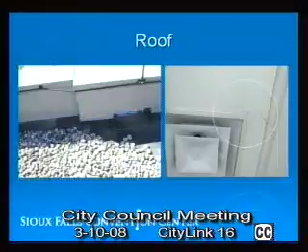Yes, we have two different budget items pertaining to the convention center. We have an OSEP budget. In the OSEP, which is $100,000, the convention center has identified two projects they would like to substitute for the two that were in there. In the original 2008 OSEP, there was an identification system for $75,000 and two portable dance floors at $25,000, totaling $100,000. The convention center has asked us to submit an amendment tonight that would substitute for those two projects a scrubber, a network upgrade, and one portable dance floor, which would equal the $100,000.

Okay, thank you Mike, so that's not any additional funding. The other 100 you're talking about would be what we call deferred maintenance, and that's a separate amendment we had talked about adding into the budget this year.

My only concern was, if we were to offer an additional $100,000 for deferred maintenance, what would they use it for? I think they've identified some priorities that need to be taken care of. The first priority was replacing the carpet, and then these other projects would equal just over another $100,000. So hopefully that clarifies it for you.

Further questions? Gene, it's my understanding that the improvements we're talking about this evening are also part of the agreement the city of Sioux Falls signed with the Summit League in their commitment to the community for a certain amount of time - that's the part on the arena, right?

Correct, the $411,000 - if you need part of that for the locker rooms and that kind of stuff. Yes, that's part of it. Okay, thank you - probably most of it.

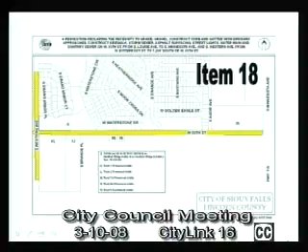Further questions, Chad, on item 18? Others that wish to address the council on item number 18? Not. Is there a motion?

Move to approve, Brown moves. Is there a second? Second, Litz seconded. Further comments on the motion to approve? Seeing none, all in favor of the motion to approve, vote yes. Those opposed, vote no.

Item 19 is a resolution declaring the necessity to grade, gravel, construct curb and gutter with driveway approaches, construct sidewalk, storm sewer, asphalt surfacing, and streetlights on South Bahnson Avenue from East 57th Street to East Mission Street, and assessing the cost to each lot or tract of land benefiting thereby.

This portion of Bahnson Avenue is a paved, half-urban, half-rural section. The east half will be constructed to an urban section, and sidewalk will be installed on the west side. There are 12 properties that will be assessed for these improvements. The cost estimate is $400,000, and the majority of these costs will be assessed. There was no opposition voiced at the public meeting.

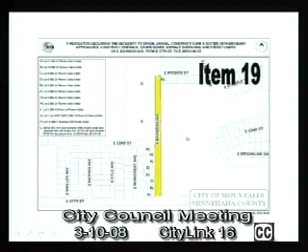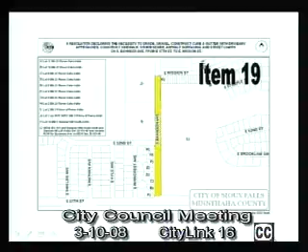Questions of Chad on item number 19? Others that wish to address the council on item 19? Is there a motion to approve? Move for approval, Jamison moved. Is there a second? Second, Benega seconded. Further comments on the motion to approve?

Seeing none, all in favor of that motion will vote yes. Those opposed, vote no. Councilmember Litz, yes. Staggers, no. Benega, yes. Brown, yes. Costello, yes. Jamison, yes. Kavanaugh, yes. All members present voted. 6 yes, 1 no, and 1 excused. Item 19 has been approved.

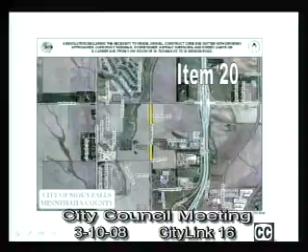Item 20 is a resolution declaring the necessity to grade, gravel, construct curb and gutter with driveway approaches, construct sidewalk, storm sewer, asphalt surfacing, and streetlights on North Career Avenue from 1,100 feet south of West Hickman Street to West Benson Road, and assessing the cost to each lot or tract of land benefiting thereby.

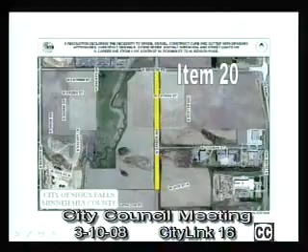This portion of Career Avenue is a two-lane paved rural section. It will be constructed to an urban section with sidewalks on both sides of the street. Career Avenue is an urban section from Maple Street to the construction limits of this project to the north. There are 12 affected properties that will be assessed for these improvements. The cost estimate is $850,000, and the majority of these costs will be assessed. The affected property owners support the project.

It's my understanding that you have received a letter from one of the property owners. That property owner and another property owner are working out a drainage issue that we hope to have resolved before construction begins. Questions, Chad, on item number 20?

Kermit asked: on the cost of the $850,000, in our notes it says all costs will be assessed. Here I said the majority of these costs. There is going to be some city costs on this. Do you know how much the city might be paying? It's probably under 10%. Okay, thank you.

Further questions, Chad, on item number 20? Others that wish to address the council? Your name and address, please. My name's Damian Grebel, Earhart Griffin and Associates, 300 North Dakota Avenue, Sioux Falls, South Dakota, 57104.

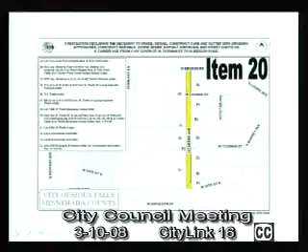I'm here tonight to represent Gene Pesca. He couldn't be here tonight, and he is one of the property owners. He actually owns 4 of the properties, A through D on your map. He asked me to come here and state again that he is for this project contingent upon finding a resolution on some storm drainage issues, working with city staff and adjacent property owners to resolve those issues. As soon as we can get those worked out, he will wholeheartedly support this project. Thank you. Questions? Thank you.

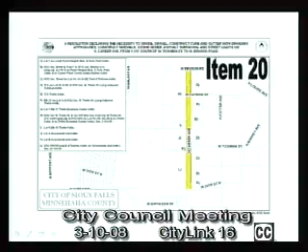Others that wish to address the council on item number 20? Not. Council discussion or action? Move to approve, let's moved. Is there a second? Second, Kavanaugh seconded. Further comments on the motion to approve?

Seeing none, all in favor of the motion to approve, vote yes. Those opposed, vote no. Councilmember Litz, yes. Councilmember Staggers, no. Benega, yes. Brown, yes. Costello, yes. Jamison, yes. Kavanaugh, yes. All members present voted, 6 yes, 1 no, and 1 excused. Item 20 has been approved.

Item 21 is a resolution declaring the necessity to grade, gravel, construct curb and gutter with driveway approaches, construct sidewalk, storm sewer, asphalt surfacing, streetlights, water main, and sanitary sewer on North Hillcrest Avenue from East 54th Street North to East 57th Street North, and assessing the cost to each lot or tract of land benefiting thereby.

This portion of Hillcrest Avenue is a gravel road. It will be constructed to an urban section. 54th Street North and 57th Street North are paved streets. There are 25 affected properties that will be assessed for these improvements. The cost estimate is approximately $525,000, and the majority of these costs will be assessed. The owners of approximately 54% of the street footage support the project.

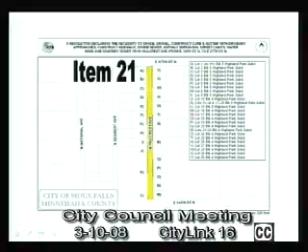There are other people, I'm sure, that would like to be here at this time, but they haven't shown up, and I haven't been able to really rally with everybody else. But I guess due to the cost, I'm really not sure exactly where we're at with adding in the storm sewer and so forth.

There is water up to the top of the hill on the east side of the property coming from 57th Street, so I have a water main right on my property now, and I can have access to sewer by going behind and hooking up to the Jelwyn property, possibly running my sewer to the north. But as far as purchasing that land to speculate on, it doesn't figure out for me to pay 6 to 7, 8 times what I paid for the property to put in a street I won't even use.

I think it should be reverted back at the very least to the same way 57th Street was improved. I do own property in that area, and other property on other streets there. When that thing finally played out, it came down to the deal that because of the expense, the people that owned the property did not have to pay the assessments until such time as they either sold or built on these lots.

So I guess if nothing else, I would hope it'd be deferred till we get some more exact costs. Questions? Thank you.

Others that wish to address the council? We don't, come forward and give your name and address, please. My name is Dave DeMartelier, 401 East 2nd Avenue, Elkton, South Dakota.

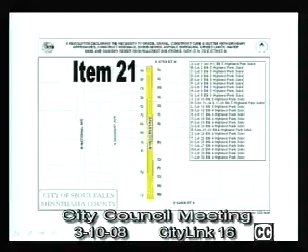I've got 5 properties there, and I'm for the project. I've tried to add on to my business, and I can't, because they said it's got to have curb and gutter, so I'm at a standstill.

When I signed for my property, when they gave me a building permit, I had to sign a waiver saying that I could not object to a road, and I believe there's other parties that also did. I'm in favor of it because I'd like to add on. The value of the property would go up for me, so that's all I've got to say.

Dave, in terms of your particular interest here, obviously you want to develop that property. Is there other development? Are the other property owners interested in developing too? Yes, sir. I know of one gentleman who bought one parcel, and he'd like to be able to put sewer and water in, and he can't do anything till that's done. So really, this is what's stopping people from developing those lots? Absolutely.

Kermit? Just to clarify, you said that to add on to your business, the city will not allow you to build anything until you agree to this. You can't get a building permit until you agree. I've tried to go through the city and get a building permit, and they said no, not until. But if you support the project, yes, you'll get one.

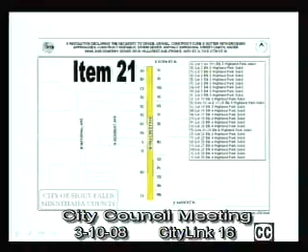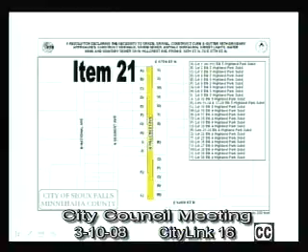My son-in-law built a building on National, right around the corner on 57th and National, a couple of years ago. He's since sold it. Same thing. In order for him to get a building permit, he had to sign that if that street was ever extended from 57th to 54th, he couldn't contest it. Well, he sold the building, so it doesn't matter. But the way the grading is there, it'll probably never go through because most of the property owners are back off a cliff and don't need it. But Hillcrest right now is a decent gravel road as far as I'm concerned. Dave's Trucks goes down it, and I'm sure it packs and compacts it real good every day. Just a comment on what happened there.

So in effect, the city is forcing people to sign away their rights to protest something.

Right, and that's another thing that came up in the discussion. I don't have any problem with it because I don't plan on building a building there myself on that lot. There are other choices and other lots in the area that would be better for me. In fact, I bought an acre and a half up there in Terry's development in January along the interstate. The curb, gutter, streets, lights, everything are in because Terry bought it and developed it. But to say that in order to have a building, you've got to sign up right now, I just don't think it's right. And another thing to reiterate, we've never been given total cost for water and sewer. All we've seen is $17,000 on one lot, only including the curb, gutter, and the asphalt street. The resolution says sidewalk. He previously said we're going to throw out the sidewalks, but I'd still like to see some hard and firm figures, so I hope you at least defer it.

Well, with regard to signing some agreement, I suppose the alternative is to not allow any development on any street that doesn't have proper infrastructure to serve it. If that's what people want the city to do, fine, I guess that's the approach they can take. But I think they're giving people the opportunity to develop their business, and I don't see anything wrong with asking them to agree to put streets in later.

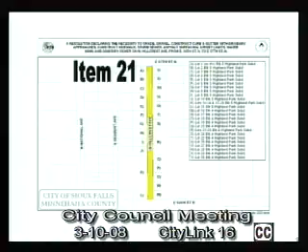Item 22 is a resolution declaring the necessity to grade, gravel, construct curb and gutter, construct sidewalk, storm sewer, asphalt surfacing, and streetlights on the west half of South Meredith Avenue from West Bitterroot Street to 900 feet north, and assessing the cost to each lot or tract of land benefiting thereby. It'll be noticed that Councilmember Jamison will be excused from this vote.

This portion of Meredith Avenue is a paved, half-urban, half-rural section. The west half will be constructed to an urban section with sidewalk. There are 3 affected properties that will be assessed for these improvements. The cost estimate is $125,000, and approximately 80% of these costs will be assessed. 2 of the affected property owners support the project but do not support the assessments.

Questions of Chad on item number 22? Others that wish to address the council on item number 22, come forward and give your name and address, please.

Todd Marceau, 2808 West Bitterroot. I'm on the corner of Bitterroot and Meredith. Myself and Mr. Wallace do support the project. We just do not support the cost of it, simply because this originally was platted to be an arterial street, which in our understanding does not cost us to put this street in. Changes have been made to the development out there, and now it's just going to be a collector street, so now they're saying we have to pay for it.

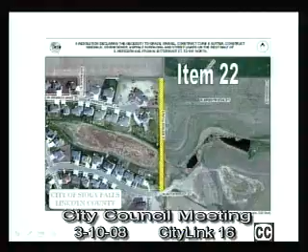Chad, you want to respond? First, on 2 issues: that portion of Kiwanis Avenue was never going to be an arterial. It was platted as 33 feet of right-of-way on that west half, which would be indicative of a collector street. Yes, he is correct that south of here, from Bitterroot Street down to 85th Street, it was realigned, but it was able to be realigned because there was not any street being built at that time. Whereas north of here, half of the roadway was built.

Questions of Chad on item 22? Others that wish to address the council on item number 22? Is there a motion to approve?

So moved, Benega moves. Is there a second? Second, Kavanaugh seconded. Further comments on the motion to approve item 22?

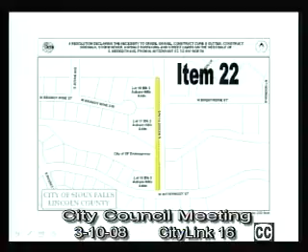Chad, when they had the whole discussion about straightening this street, I know that was somewhat controversial. Can you tell me what percentage of the neighborhood favored your conclusion? Favored the project just on this little stretch? No, or the whole project when it needed to be redone.

I'll have Mark address that. You do remember that in late 2006 we worked with that neighborhood. The land immediately to the east was not developed, so we were able to realign. We had extensive discussions with all the houses south of Bitterroot, and they did support the realignment. Chad was right, it was understood that this piece to the north would always stay on this alignment. We communicated that in those public meetings.

One of the advantages of the assessment process from the city's perspective is that the city actually finances these projects and allows a 5-year payback from the property owner. That's one of the key aspects to assessment projects.

Questions, Mark? Thank you. Others who wish to address the council on item number 22? Not council discussion, we've got this on 22. We've got a motion made and seconded on item 22.

Further discussion? Seeing none, all in favor of the motion to approve item 22 vote yes, those opposed vote no. Councilmember Litz? Yes. Staggers? No. Benega? Yes. Brown? Yes. Costello? Yes. Kavanaugh? Yes. All members present have voted 6 yes, one no, and one excused. Item 22 has been approved.

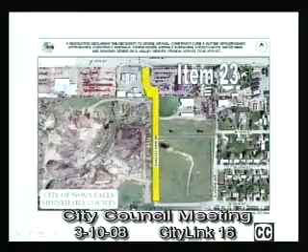Questions of Chad on item number 23? Others that wish to address the council on item number 23? Is there a motion to approve item 23?

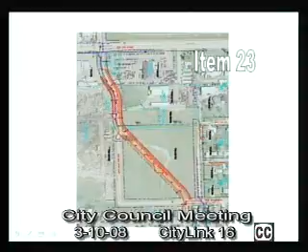Move for approval, Kavanaugh moved. Is there a second? Second, Benega seconded. Further comments on that motion to approve?

Seeing none, all in favor of the motion to approve vote yes, others vote no. Councilmember Litz? Yes. Staggers? No. Benega? Yes. Brown? Yes. Costello? Yes. Jamison? Yes. Kavanaugh? Yes. All members present voted 6 yes, 1 no, and 1 excused. Item 23 has been approved.

Item 24 is a resolution declaring the necessity to grade, gravel, construct curb and gutter with driveway approaches, construct sidewalk, storm sewer, asphalt surfacing, street lights, water main, and sanitary sewer on North Van Epps Avenue from East Benson Road to 300 feet south, and assessing the cost to each lot or tract of land benefiting thereby.

This portion of Van Epps Avenue is a gravel road. It will be constructed to an urban section with sidewalk on the west side of the street. There are 2 affected property owners that will be assessed for these improvements. The cost estimate is $200,000, and the majority of these costs will be assessed.

A requirement of the development plan for the strip mall on the west side of the street was that Van Epps is improved. The property owner on the east does not support the project, but he has been working with us on the design. That cost estimate of $200,000 includes a retaining wall that will have to be built. We are working through some final design issues to try to eliminate that retaining wall, which would bring the cost down. Questions of Chad?

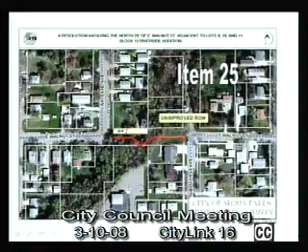Item 25 is a resolution vacating the north 25 feet of East Walnut Street adjacent to lots 9, 10, and 11, Block 12, Riverside Addition. This portion of Walnut Street is east of Cliff Avenue in the John Morrell area. This section does not contain any utilities and is unimproved. A utility easement will not be maintained. This area was annexed into the city after the petitioner's home was constructed. The structure sits 1 foot from the north right-of-way line and is considered a non-standard lot. The vacated right-of-way will allow the property owner's lot to be considered standard with proper setbacks. The petitioner has complied with our street vacation policy and is present tonight to answer questions. Engineering has no opposition to the street vacation.

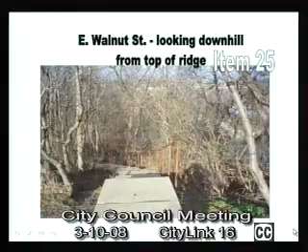I'd like to comment — last time I was asked why we aren't vacating the entire portion of Walnut Street. When we come forward to vacate this, we want to do it in a manner so we can vacate it and then get in there and take that sidewalk out, so he can have his lot conforming before that time frame. Bob Jamison: When that happens, will the adjacent landowners file a petition to vacate as well? I think city staff will route the petition and hold a public meeting to let everybody know what's going on. Okay, thank you.

Chad, I know we've spent a lot of time on this, what would seem like a small thing, but I think we've got it right, and we're heading in the right direction. I'd sure like to vacate this tonight and give that gentleman the ability to do what he wants with his property. Thank you for your patience and hard work on this, as well as the gentleman in the audience who's been affected by this. Further questions of Chad? Others that wish to address the council on item number 25?

This takes 6 votes to vacate, so is there a motion to approve the vacation? So moved. Who seconded? Kavanaugh seconded. Further comments on that motion? Seeing none, all in favor of the motion to vacate, vote yes. Those opposed, vote no. Councilmember Litz? Yes. Staggers? Yes.

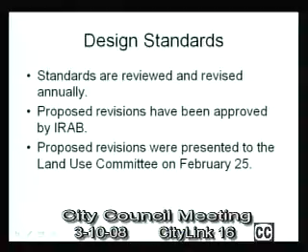Item 26 is a resolution amending the City of Sioux Falls engineering design standards. These standards are engineering principles used to provide citizens a safe, cost-effective, and efficient public infrastructure system, and they are reviewed and revised annually. The proposed revisions have been approved by the Infrastructure Review and Advisory Board, and were presented to the Land Use Committee on February 25th.

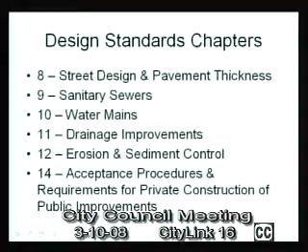We are proposing changes to 6 of our 15 chapters, and tonight I will highlight a few. The first change is in Chapter 8, Street Design and Pavement Thickness, where we've added language regarding access management. Our principles and standards are based on the Access Management Manual, a document produced by the Transportation Research Board of the National Academies, which are advisors to the nation on science, engineering, and medicine.

We've also added language regarding our functional street classifications, and added design standards for medians, roundabouts, sidewalks, and bicycle paths. A lot of what we've added are things we have been doing as we constructed medians, sidewalks, and bicycle paths — we just never had them written into these standards. With roundabouts, we're going to have one built this summer, maybe two, so we've included language for our design consultants to follow when designing roundabouts.

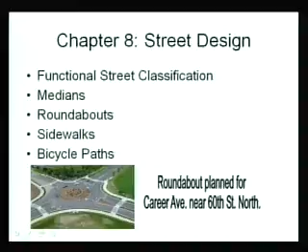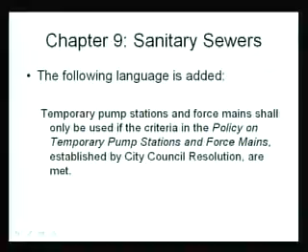Chapter 9, Sanitary Sewer, we added language regarding the temporary policy on temporary pump stations and force mains, which was approved by resolution. Chapter 10, we added information regarding water mains, requiring hydrants to be installed on both sides of arterial streets, and included language regarding the protection of fire hydrants.

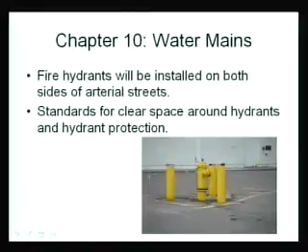Chapter 12, Erosion and Sediment Control — the major change is that we have removed straw bales as an acceptable sediment barrier, due to a lack of availability and maintenance issues associated with them. You were all given a detailed copy of all of our changes, and I have staff here tonight to answer any questions you may have.

Questions to Chad on item 26. Bob Jamison: Chad, there was some discussion when you were talking to the Land Use Committee about access permits being obtainable any time during the process. Is there a specific time that access permits have to be established — prior to the preliminary plan, the final plan, or what?

Right now, access is not approved until we receive and approve a final plan. What we see is a lot of need for people who want to sell their land and want to know where their access will be prior to doing a preliminary plan and final plan. So now we've included a means by this permit where they can do the necessary work — some initial layouts and maybe a traffic study — and come in at any time. We can review their numbers, run the calculations to make sure there won't be any adverse effects on traffic operations, and then sign an access permit approving their permit and access location.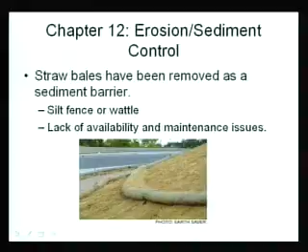Chad responded: we are working through revisions to the subdivision ordinance right now. Part of that ordinance deals with the process and what is included in a preliminary plan versus a final plan. One of the things the Infrastructure Review and Advisory Board wanted us to do was work through Chapter 8 and the access issues and access permit first, and once that's worked out, bring the changes here. Now we will move back to the subdivision ordinance, and we are having these discussions there right now.

So that will be taken up later on in the discussion? Well, I think the access is not approved at the preliminary plan stage. But what this access permit does is it allows somebody that wants to sell his land to come in, do minimal work, don't do the full preliminary plan engineering work, and don't do the more detailed final plan engineering work, but just do what he has to do to guarantee and get that access approved.

And this is what members of IRAB and the development community have requested that we do.

Well, I guess my only concern is that if we're selling a concept on a piece of property, and now we're going to develop it, that access becomes the key factor to the net worth of that project. I think that's one of the things that you need to have established somewhere in the plan before it gets too far down the road, that we have established the access permits so that the developer, the person buying the property, knows exactly what the access is to that property. And I think we need to get somewhere in there so that it's established. It's just, I guess I'm speaking because I'm vitally interested in these type things, but it's one of those things that I think it's only fair to both sides.

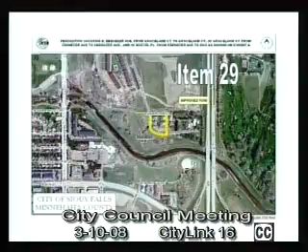Item 29 is a proposed resolution vacating South Ebenezer Avenue from Graceland Court to Graceland Court, with West Graceland Court from Ebenezer Avenue to Ebenezer Avenue, and West Botel Place from Ebenezer Avenue to end, as shown on Exhibit A. These unimproved streets are north of 26th Street between Interstate 29 and Marion Road.

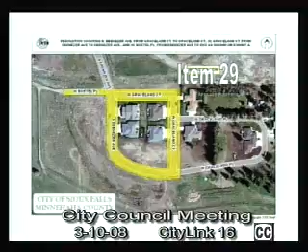A utility easement will be maintained. The petitioner plans to move the existing structures and build two apartment buildings to begin with. The petitioner has complied with our street vacation policy. Okay, further questions of Chad on item 29? Let's go to 30.

Item 30 is a proposed resolution vacating North Cliff Avenue Row and North Drive Row from the southeast corner of Section 4, 10149 of the 5th PM, Minnehaha County, South Dakota, to the south row line of East Amidon Street, extended east to the section line, except that part abutting County Auditor's Tract 4 in the southeast one-fourth of said Section 4, as shown on Exhibit A.

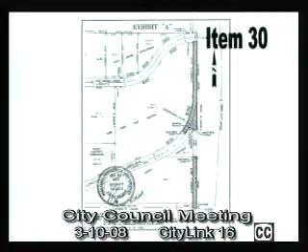This unimproved right-of-way is north of the Street Department campus and was reconfigured during the Cliff Avenue reconstruction last summer. A utility easement will be maintained. The petitioner plans to develop the site, and the petitioner has complied with our street vacation policy. Questions of Chad on item number 30?

Let's go to 31. Item 31 is a proposed resolution vacating the alley adjacent to lots 4, 5, 14, 15, Block 18, J.L. Phillips Addition. This portion of the alley is east of the Washington Pavilion and bordered by 11th Street and 12th Street, and then Main Avenue and Phillips Avenue. The alley is paved and contains sanitary and storm sewer.

A utility easement will be maintained. The petitioner is remodeling the building at 314 South Main Avenue, and that building will house offices of the federal government. The federal government requires limited access and plans to install gates in that alley, the first one being at 12th Street, and then one on the north edge of our vacation limits.

All parties that need access for parking and access to their businesses will have access cards. The petitioner has complied with our street vacation policy. Questions of Chad on item number 31? None. Is there a motion to set the hearing date for items 29 through 31 for April 14th?

So moved, Litz. Litz moved. Is there a second? Second, Benega. Benega seconded. Further comments? All in favor of the motion to set the hearing date for items 29 through 31 for April 14th, vote yes.

Those opposed, vote no. Councilmembers: Litz, yes. Staggers, yes. Benega, yes. Brown, yes. Costello, yes. Jamison, yes. Kavanaugh, yes. The hearing date has been set, 7 yes and 1 excused, for items 29 through 31 for April 14th.

Is there a motion to adjourn? Move to adjourn, Kavanaugh moved. Is there a second? Second, Litz. Litz seconded. All in favor of that motion to adjourn, vote yes, those opposed vote no.

Councilmembers: Litz, yes. Staggers, yes. Benega, yes. Brown, yes. Costello, yes. Jamison, yes. Kavanaugh, yes. We stand adjourned.